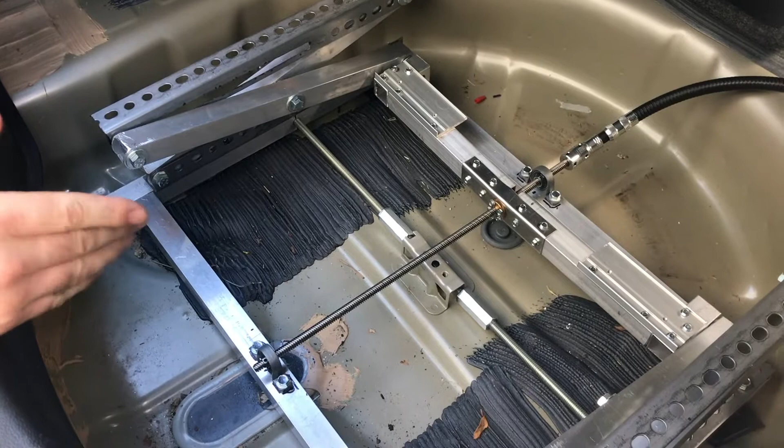When designing our mounting system, we wanted to take advantage of the existing spare tire mount to eliminate any need for modification or drilling into the vehicle itself. We utilized all-thread and some all-thread couplings. This makes it very simple to remove.

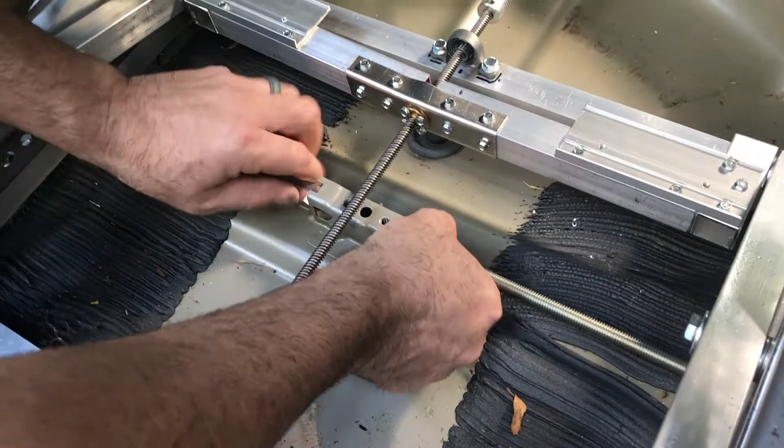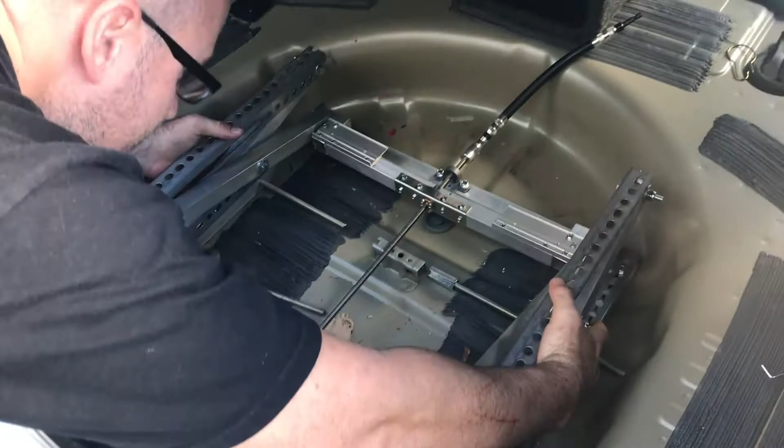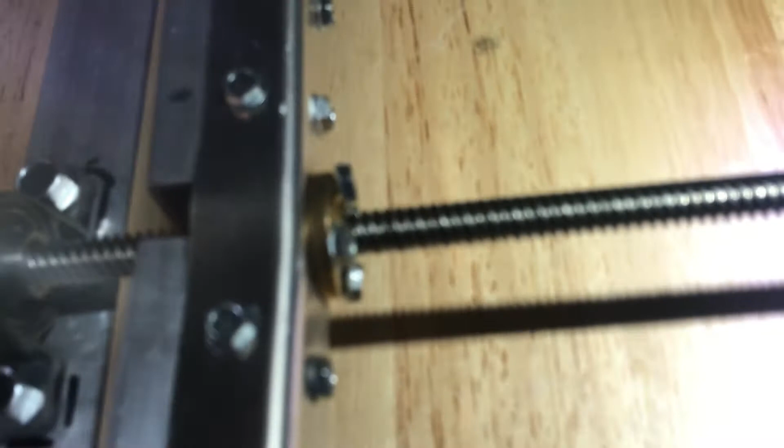For our design, we chose to use a lead screw setup, which allows us to convert the torque from an electric motor into linear motion to actuate our cargo lift.

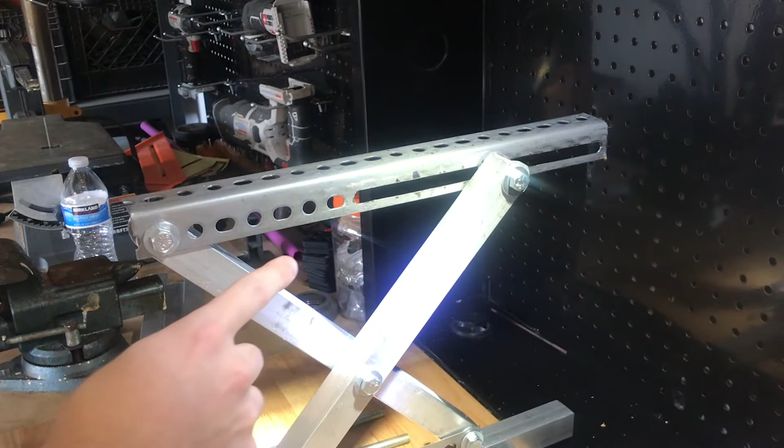For prototype purposes, we chose boxed aluminum for the ease of machining, while still being rigid enough in its boxed form. For the sliders, we used pre-drilled angle iron because the pre-drilled holes made it easy to create a slot. We chose steel to retain its rigidity when the slots are made. Additionally, the input link shares a common pin with the slotted pin to allow the input link to stay on the same plane as the motor raises the trunk.

When designing our mechanisms for its desired functions, there were a few iterations to our model. Our first model looked something like this. We thought this was good, but upon further examination, we realized that both the functions of retracting and coming out would be difficult for the motor as it crosses this 90-degree angle.

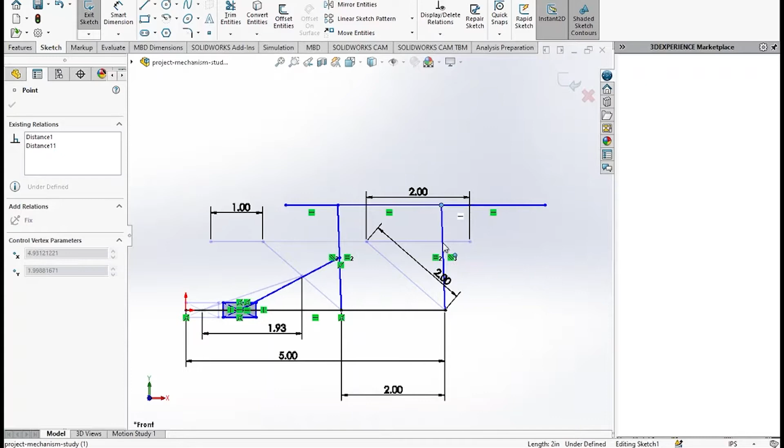Our second iteration of the mechanism looks something like this. It's very similar to the first design, but the input link is found on the trailing arm instead of the leading arm. While this is more compact and about as strong as our last model, we realized that the throw of the input link was far too much for our motor to handle, so we opted to redesign for a third iteration.

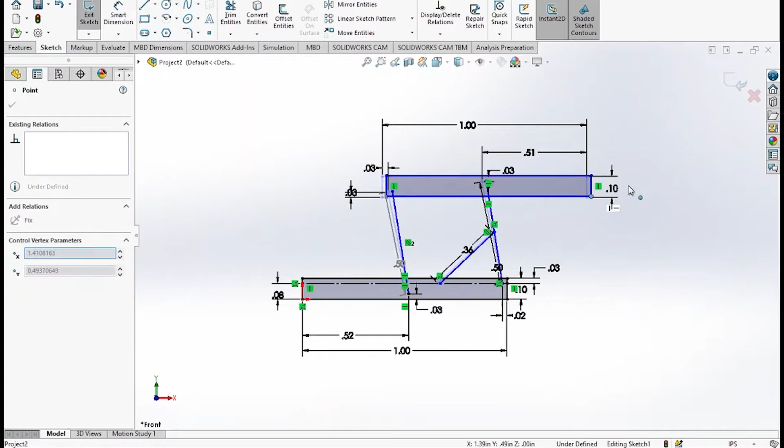Our third and final iteration of our project had its links oriented like this. This proved to be the optimal design for our objective because it would be considerably easier for the mechanism to retract than it would be for it to come out, which is beneficial because in our application, the cargo would only be placed on the trunk deck when it's in its extended position. This design is also fairly compact, and it only struggles in one direction, where some of our previous designs struggled in both directions.

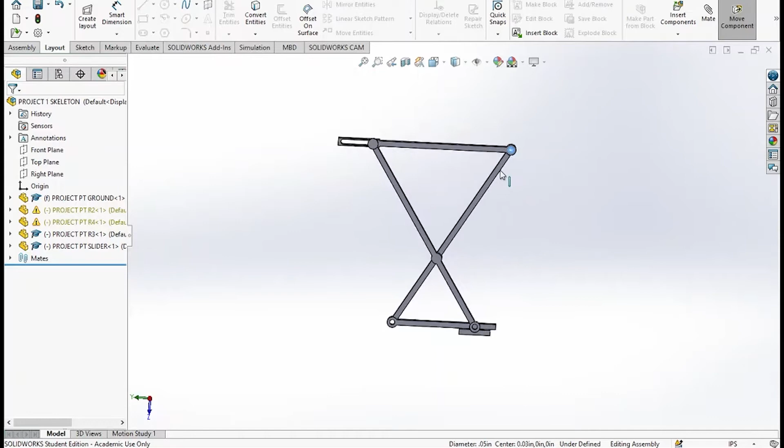When designing our mechanism digitally, we knew that space was going to be a big constraint because we wanted to fit the whole assembly in the spare tire compartment, so the liftable trunk would naturally rest in its original position. Because of this, we first modeled the trunk to its appropriate dimensions.

When designing the mechanism, we realized that there was an inverse relationship between the mechanical advantage and the translation of the mechanism. In other words, the easier it is for the motor to move the mechanism, the less it's going to come up and out of the vehicle. Because of this, we tried to keep the mechanical advantage as close to 1 as possible so that the required range of motion was met.

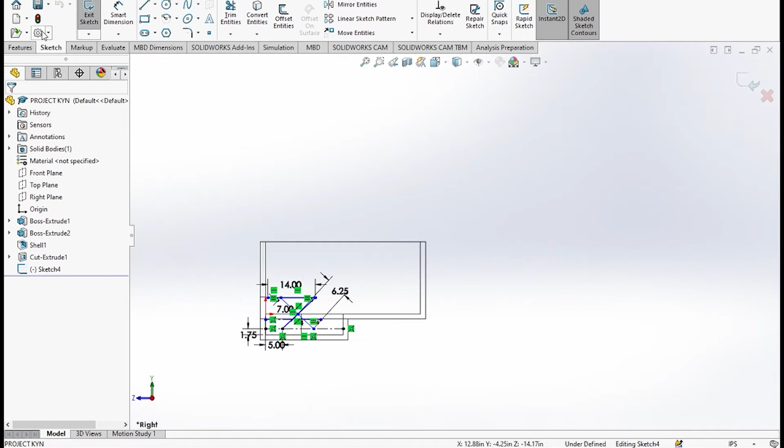The overall length of the mechanism was chosen because there's another inverse relationship between the length of the mechanism and how wide the legs could be mounted apart. As demonstrated here, since it's radius on this end, the longer that we make these links, the more inward they're going to have to be, which means that the mechanism could easily topple over if weight is put on the edges.

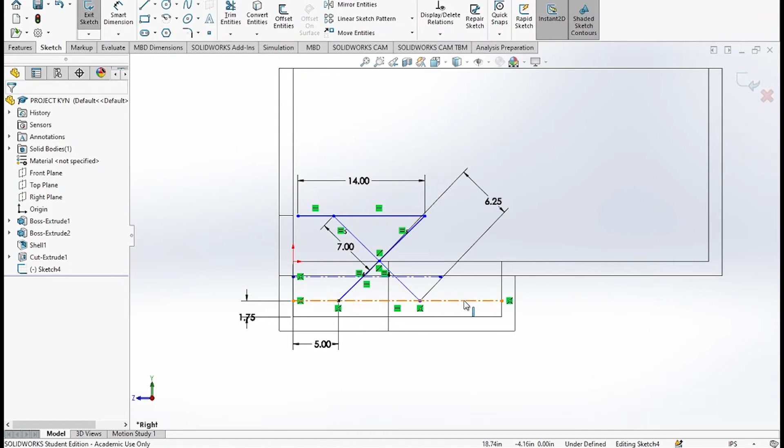Additionally, when digitally designing our mechanism, we also took into account the thickness of the frame that the mechanism would be mounted to, and the back spacing that the mechanism would need for the motor to have its full range of motion.